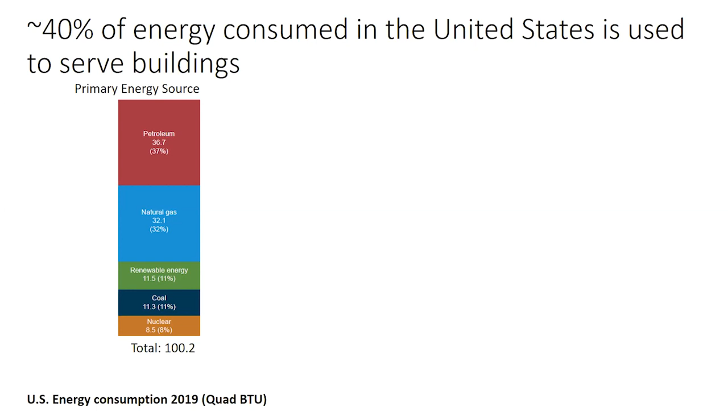So buildings are a really important place to talk about when we're talking about sustainability. They consume about 40% of primary energy resources consumed in the United States each year. And those come from fossil fuels like petroleum and coal, as well as renewable energy. And the US consumes a lot of energy, about 100 quadrillion BTUs per year.

These renewable and non-renewable sources go to produce electrical power, and then they go to end-use sectors, including transportation, industry, residential sector, and commercial sector. And so that energy is either directly going to these end uses, or it's going first to create electricity with losses, and then to power those sectors.

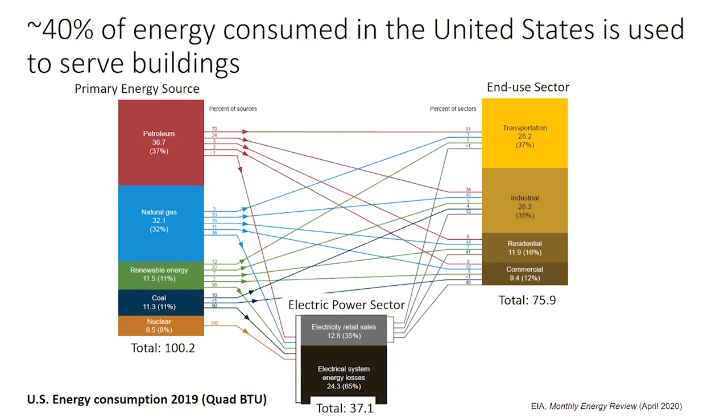Buildings, homes, and businesses in the residential and commercial sector contribute about 12% of the nation's greenhouse gas emissions. And a majority of those emissions are associated with energy consumption. You can see the orange line is the upstream emissions coming from electricity that's used in the homes and buildings. And the blue line are the direct emissions, and most of those are coming from heating and cooking. And you can see over time that there hasn't been a lot of change in the direct emissions.

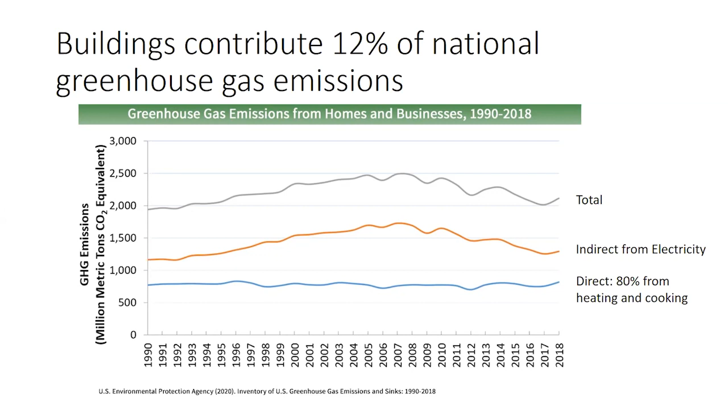This has been a very difficult area to reduce the emissions of, and so it's a really critical place for research to occur. There's a lot of ways that you can quote unquote green a building or lower the carbon emissions associated with that building. In new buildings, this is often seen as designing for sustainability. So they can be more energy efficient, or they can use renewable energy sources. Or in older buildings, you can look at the retrofitting of those buildings, as well as the use of more efficient appliances.

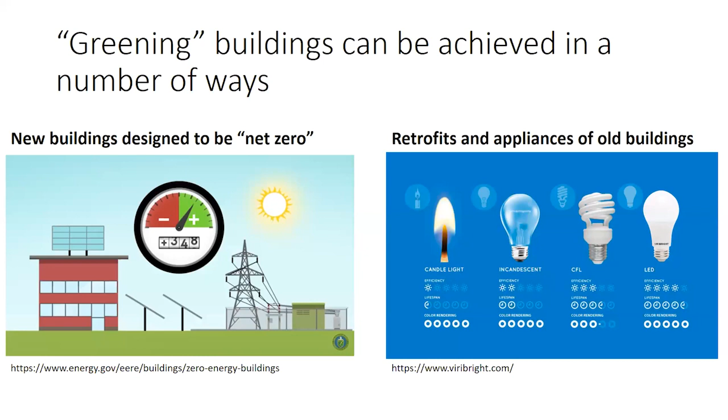So for the sake of the coronavirus era, I am without childcare, so my kid is going to be here. Hey, I'm on a meeting right now, okay? I'll come and get you in a bit. So that's going to happen maybe once or twice.

So these are really important technologies, but at the same time, we're faced with a really pressing, urgent change in climate. And there's also new science coming from smart meter data and climate change projections that are starting to help us understand who's going to be most exposed to these climate impacts.

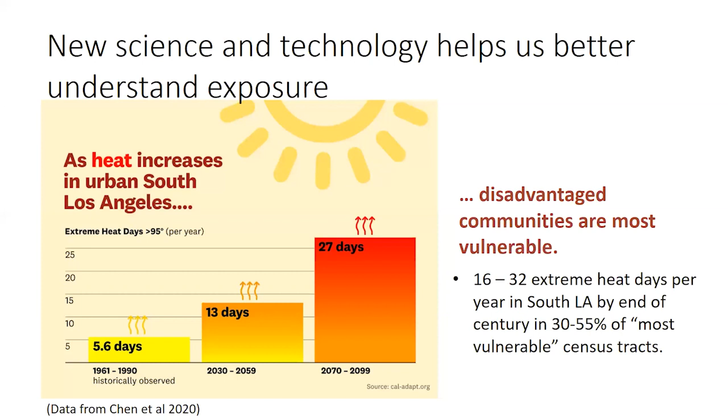So we're faced with a real issue when we talk about equity in sustainability. It's not just about pushing people to use less energy by making them pay more, or having very expensive green technologies that are out in the market and then we somehow hope these are going to be deployed. It's about really lowering exposure of the most vulnerable communities to climate drivers. And this is an area that I'm very passionate about, and I find very fascinating to look at where the opportunity for not only social politics can come to play, but also technology solutions.

So in general, people in poor neighborhoods are going to be more exposed to climate change health threats. And these people are also the ones who probably have less access to healthcare. And we've seen this in the pandemic, the disproportionate amount of people who are affected. So this is what I'm going to talk about a little today for this session, is about how you can have access to not only energy efficiency, but reliable and resilient technologies for providing energy services.

So can we turn this race to net zero carbon into a bigger opportunity to reimagine urban services? So if we're just talking about focusing on lowering emissions and energy efficiency, I'm finding a lot of these projections of what should happen are really looking at an urgency on compliance and adoption of better technologies, or drop-in technologies to what we already have, like hybrid vehicles. And those are very important solutions, but there's a lot more to it to improve a community and create social equity in sustainability.

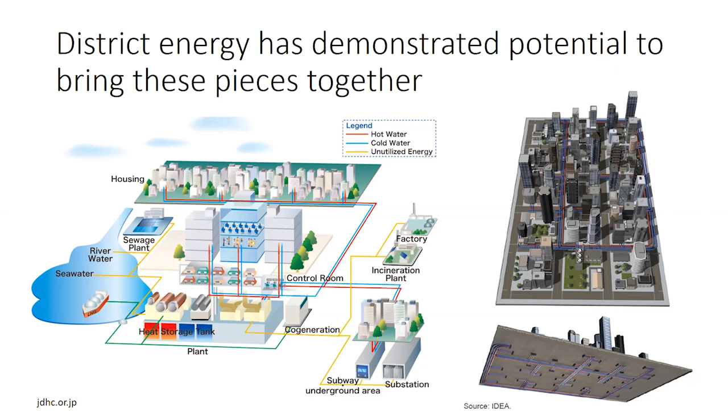There's also an opportunity to bring in waste heat sources and sources of waste biomass that can bring in local industries. And district heating and cooling has changed a lot over time.

Cost savings have been demonstrated in many different end uses. And so there's a really compelling drive now to look at these modern district systems for community service.

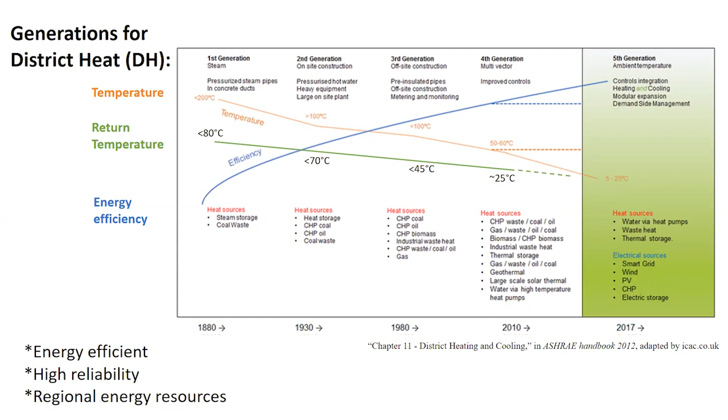There's also fascinating aspects around district energy for their ability to provide this shared sense of energy. This is a very cool project, I think it's in Alberta, Canada, and they use solar energy to actually charge underground where their thermal reservoir is, so that during the winter time, they can actually use that excess energy and provide their heat.

So this is really interesting to talk about sharing thermal energy storage at scale, not each home having its own battery. There's also economies of scale that come from having these large systems. Sure, it's a very large upfront capital investment, but you can apply better, let's say, air quality emission technologies at the facility generating the energy in a way that you couldn't possibly imagine doing at a single building.

There's also district energy solutions for both brand new developments and existing infrastructure. I think it's amazing, this system in downtown Phoenix, how over just a few years, they've been able to add on more and more buildings with one central system. And so the economics of expanding a system to a new building, or maybe a building that just has an increased need for cooling because of changing climate, is possible.

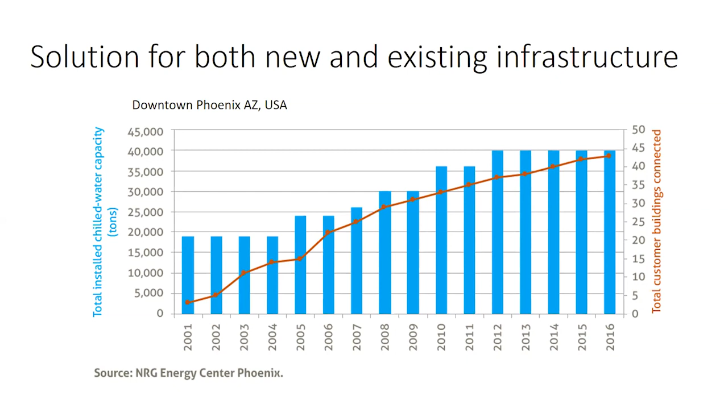So there's also some challenges. District energy largely remains a solution for campuses in the United States, and about 90% are powered by fossil fuels still. So you see here, these are the additional floor space in the United States served by district energy systems.

And campuses are in green, like schools, hospitals, institutions. You have very little change over time in the amount of residential sector coming in.

And this isn't the case all around the world. It's the case in the United States primarily. If you look at these different countries that have a long history of using district energy and cooling, you see they're using recycled heat, direct renewables, and some fossil fuels predominantly in gray. Finland, for example, is driven by district energy because they have so much recycled heat from the paper industry and from their timber industry.

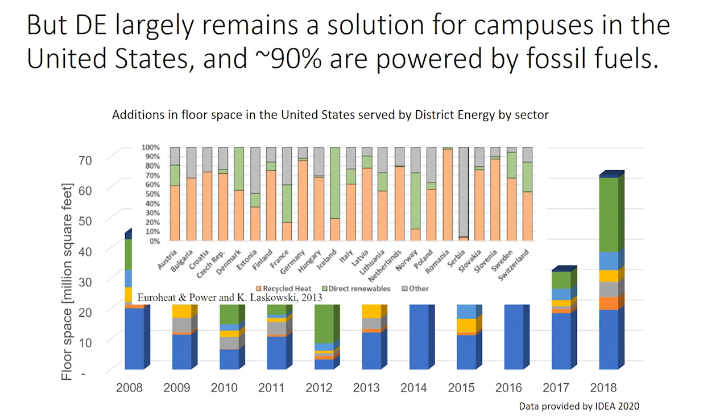And despite there being over 900 systems in the United States, it's not commonplace in the minds of Americans. And that's going to create a challenge when communities are coming together to talk about what are the possible options for a green world. District energy is not going to come into the conversation.

You look at these systems, they're predominantly in colleges, downtown utilities, military, and the trend I see here is that there are single users and operators who are seeing the benefits. Even if many students on a campus are benefiting, they don't understand where their energy is coming from. It's going to be the campus who gets the benefits.

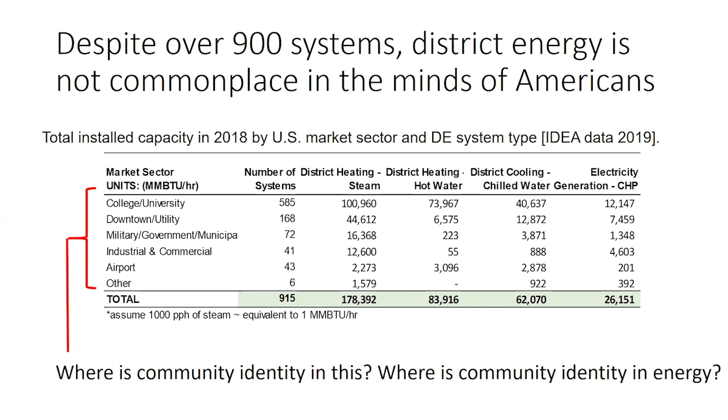And so in my mind, I see this as a real challenge, that there's no community identity in this. It's not multi-stakeholder. In general, we have this issue in the United States that there's not a lot of community identity in your utilities. And I think that's changing, and that's an opportunity that can be leveraged in a big way when we start talking about sustainable communities.

And there's a lot of opportunities for district energy to play a role here, because a lot of the end uses for energy in buildings are not easily electrified, which means you can't just switch it from natural gas or fossil fuels to electricity so rapidly. You have a lot of homes, you might have the home yourself that's heated with a wall heater that runs on natural gas. And there's a lot of systems in industry that really fit well with the high temperatures required for their processes with steam.

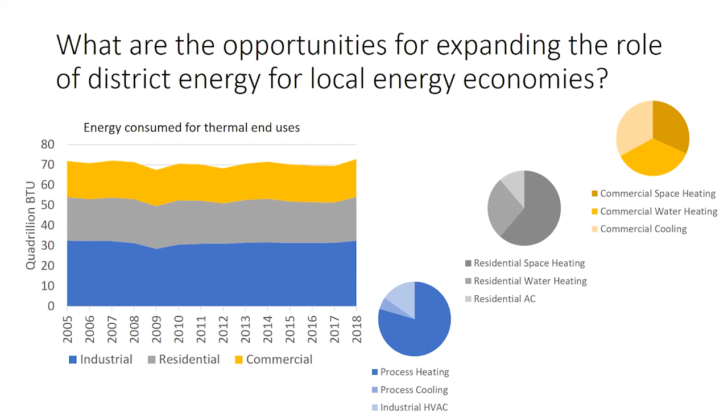And so when we look at what's been happening in the last few years, a recent report, a 2019 Congressional Report, attributes growth in the district energy sector to two primary factors. One is expansion in traditional markets - that might be campuses, military bases, airports. And the other is sustainable city initiatives, renewable energy standards, and the need for resilience in new markets.

And when I was looking through the literature and at different reports with the support of IDEA, the International District Energy Association, we found that this second point is very hard to validate. There's a lot of qualitative information, but not really a lot of quantitative information. And from a research perspective, this is an area for improvement, where you need metrics and validation to be able to go to communities and demonstrate that these systems don't just work on campuses - they also can work very well for communities.

So when we went through different proposals for projects that might be coming online in the next 10 years, looking at these drivers, you can break them into a few groups for simplicity. You can talk about the energy supply conditions - do you have a lot of thermal resources on hand in the area? You can talk about energy demand conditions - do you have the right density of buildings that could benefit from this district energy? Do you have policy conditions that would incentivize the use of regional energy resources or community sharing? And then do you have that drive, that local energy economy with real stakeholders who are invested in making this happen?

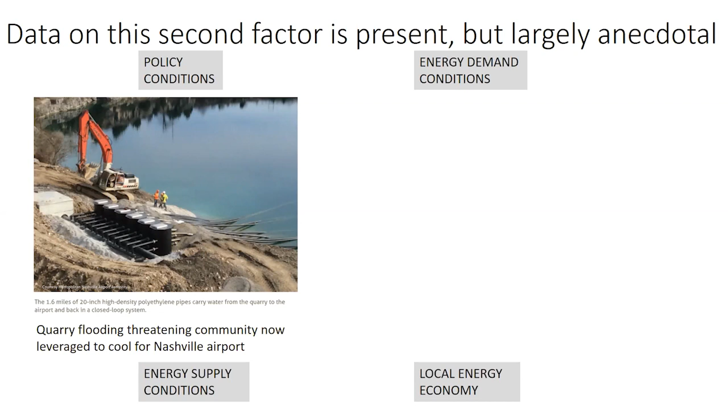On the other hand, you have growing cooling needs in downtown Phoenix, which has led to a very, very successful district energy system and its expansion.

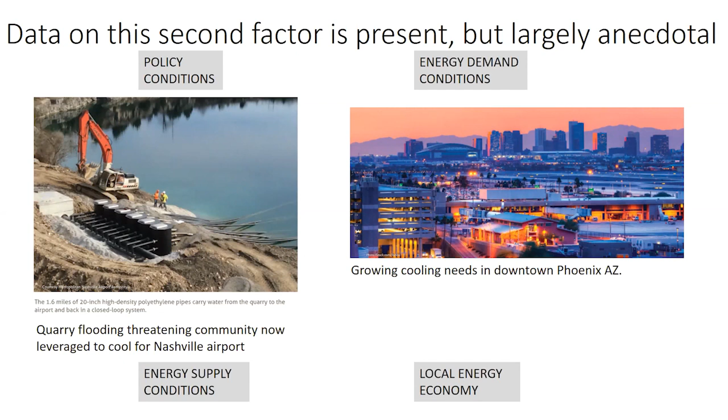There's substantial amounts of cooling and new developments in the area. So the complexity of this is real, and there's a lot of pieces, some qualitative, some quantitative. But if you break these down further into what are the drivers for different scenarios of deployment, you can start to see some trends.

What we found is that you can break expansion of district energy into new projects, brand new developments of district energy, expansion projects where you have an existing system and you're expanding it, and modernization projects, which I view as retrofitting of the system. Maybe it only provided thermal energy and now it's going to provide electricity, or maybe you want to make it more sustainable, and instead of using coal, you might use biomass.

So you start to see some factors are across the board going to be beneficial: zero carbon goals, new energy resources, increased cooling loads. And then you see some that are very specific to one scenario. For example, a brand new system in a local energy economy really requires an understanding of who you're displacing, what the utility support might be for this system, and how this is communicated to the users.

In my research, I work with a number of people at the lab, and we coupled this project looking at district energy system drivers with another project done for the California Energy Commission that looked at the ability for mixed-use developments, meaning a mix of residential, commercial, hospital, other types of floor space. We looked at the growth of floor space and need for these buildings in California, areas where there was a high likelihood of these mixed-use developments being generated by 2050. Then we tried to understand whether there was an overlap of drivers where there would be potential for district energy to serve those systems.

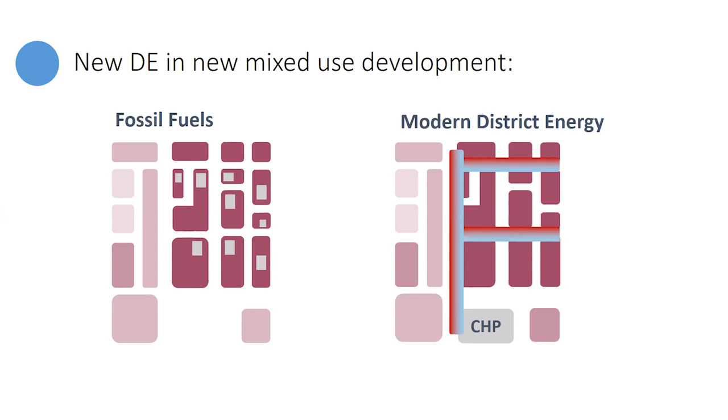So what we did is we looked at a modern district energy system that uses what we call CHP, combined heat and power, providing electricity and heating and cooling to these buildings, and we compared it with the fossil fuel option, where you have a grid coming in providing electricity, and individual buildings with their boilers in the basement. We also compared this with a renewable scenario, to understand the benefit of using this district energy system instead of heat pumps based on renewable electricity.

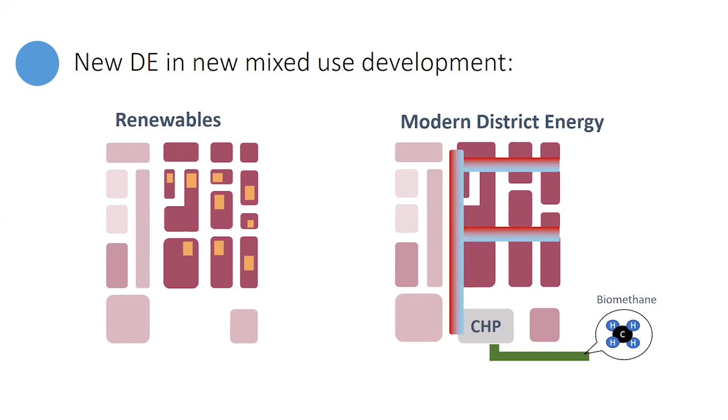We also looked at the opportunity for using the growing amount of bioenergy in California. For a brand new system, we considered an ability to tap into a resource that looks a whole lot like natural gas, a drop-in technology using natural gas pipelines, and through policy you can get credits for using bioenergy injected into that pipeline. Or if it's a brand new development, you could talk about a community co-locating that district energy system with a new mixed-use development and some system to take the waste, your garbage, food waste, or local agriculture waste if you're in the Central Valley, and convert it into energy on site.

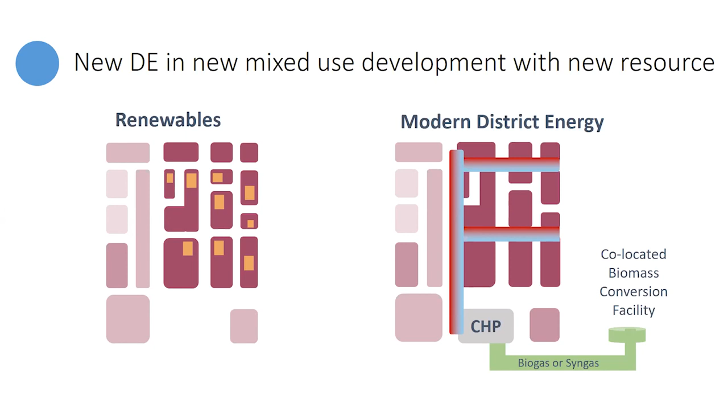Now, there's a lot of problems with trying to propose this in a community that's already established. Some of these facilities might be noisy, they might be smelly, but if you have a brand new facility, you might be able to design it in a way that makes more sense and doesn't have these local impacts on the community. There's also then the classic case of the expansion of existing district energy systems, so we looked at that.

We looked at a community with a district energy system, we have a number of them in California. And then we said, what does the economics look like for just expanding it to a new community, like a multifamily house. There are other examples for modernizing, and we're starting to see proposals coming in.

This is downtown Pittsburgh, actually, where this conference was originally going to be held. They have a number of systems, and there's some real interest in creating more of an energy sharing situation. I think this is really fascinating - we talk about the shared service economy where you have Lyft and you don't own your own car. Maybe we can get people to start thinking about this for energy too, where you're sharing resources, and instead of these four blocks being totally separate networks, they actually tap into each other and create a more resilient system.

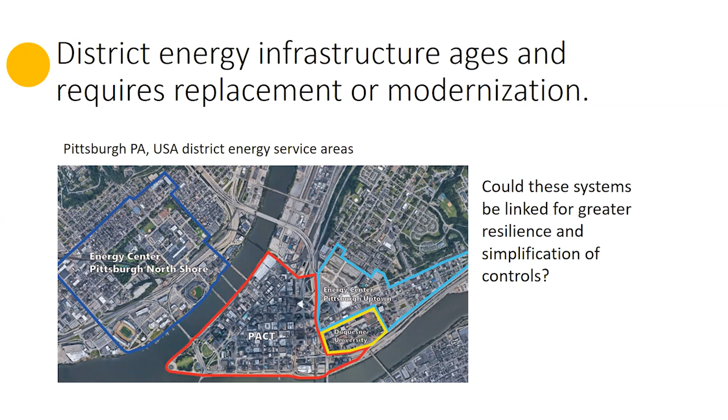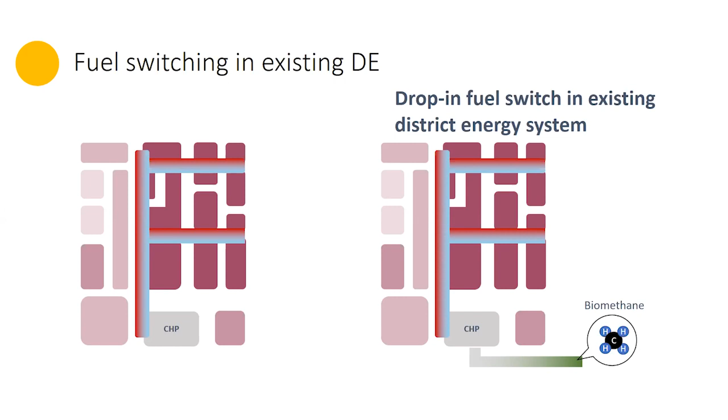In the same vein, there's also the ability to modernize a system through fuel switching. And so we looked at that. We said, okay, you've got this traditional system that's using fossil fuels like natural gas, and now you're going to switch it over to a renewable resource. There's also modernization where you didn't provide electricity originally, and now you're going to switch it over to combined heat and power.

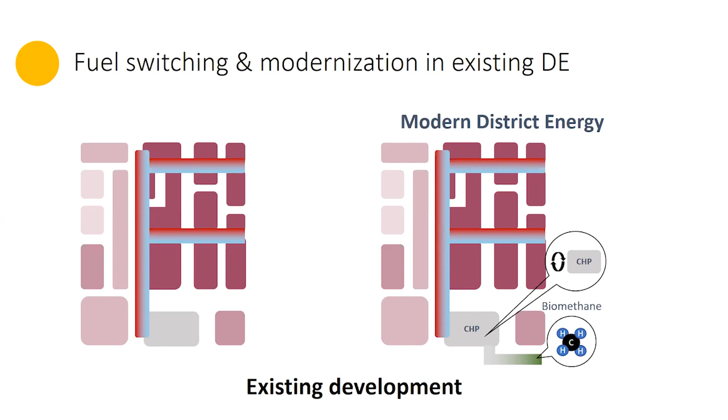So we looked at the cost of this, and I'm going to show some results for the Bay Area. So you see this is amortized annual cost in millions, and the point shows the net, and these lines show the profile of the cost. So this is heat pump electricity in this renewable energy scenario. So here we have renewable energy powering heat pumps.

We show labor, we show the sales, which would be the revenue, and then we compare that with the fossil fuel case. And you can see from the net that the renewable heat pumps is going to cost more than the fossil fuel system.

Then when we compared this to our district energy systems, and these are all brand new systems, we found that this is biogas, where you aren't cleaning it up and you have a local facility generating it. Biomethane, where you just tap into the natural gas pipeline and you're paying for the renewable energy credits. Or syngas, which is a mix of kind of hydrogen and carbon monoxide that's generated from the gasification of very dry biomass. So these are just technologies for making bioenergy.

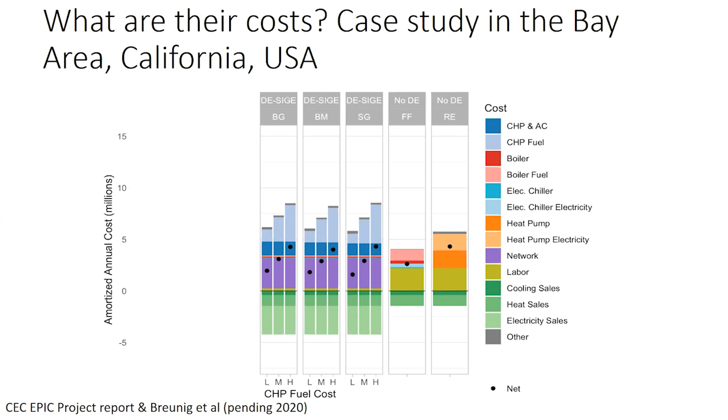And we look at the cost profile, and we find that based on the price that we assume for this fuel, you can actually get substantially better numbers than the fossil fuel system. You can also get a little bit higher than the renewable case at the highest fuel price. So this is a really interesting analysis because it's starting to demonstrate not just we know policy is important, but how important is it? What's the difference between being better than renewables or fossil fuels?

And then finally, we looked at, instead of using a spark ignition gas engine for these systems, a fuel cell, so a bit more modern for the combined heat and power facility. And so that also gave us some new results on not only the policy aspect, but the impact of technology.

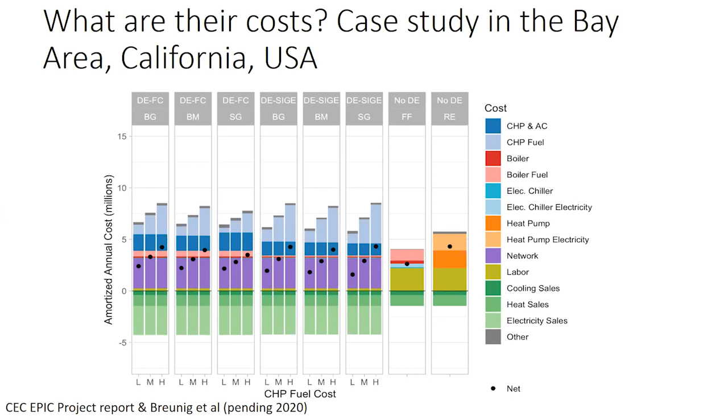We looked at 5 different areas: the Bay Area, the Central Valley, Los Angeles, Northern Central Valley, and San Diego, where we expected these mixed-use developments to be very viable. And we looked at the case for what we call expansion. So not just a brand new facility, but an existing facility that's going to be modernized or expanded. And so here you can see there's also cases where you can be negative and cases where you can be positive. And it is dramatically different based on the need for energy in these different regions.

Each of these different systems provides the same amount of electricity and heat in one location, but then across the different locations, we found very different sizes of district energy systems were going to be needed. So the Bay Area is a mild climate. It had actually the smallest system, and then some of the largest systems were in Central Valley. So this was a very interesting analysis to be able to combine not only just one location, but to start generalizing what our findings are.

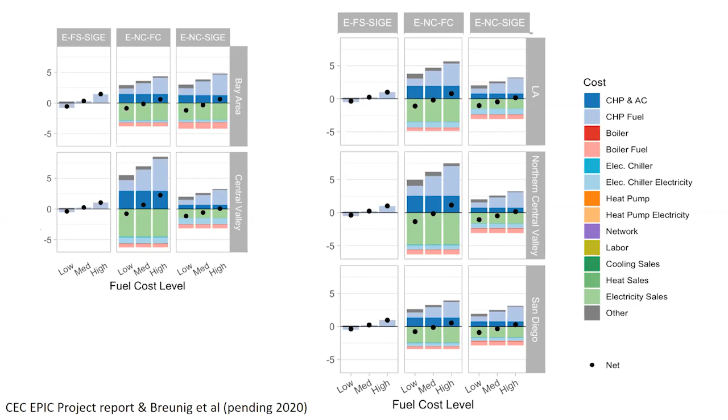And so what about new district energy systems in existing communities? So far we've talked about largely brand new systems. Well, this is a very challenging piece to bring in because a district energy system requires digging up the ground, putting in the pipes, and that's disruptive to traffic. And it also might be having to maneuver around the location of buildings that aren't designed for district energy.

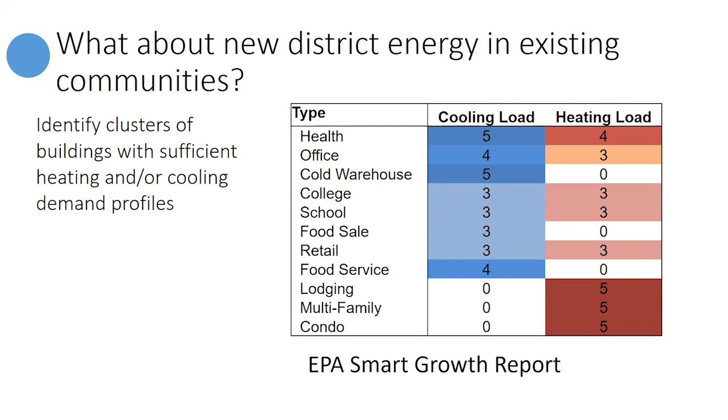It has a high cooling load, has a high heating load. And based on these rankings, we were actually able to look at the buildings throughout California over time. We developed a building stock turnover model, which means you project construction and demolition of different buildings that you have, and based on economic drivers and population, what the potential buildings might look like in the future.

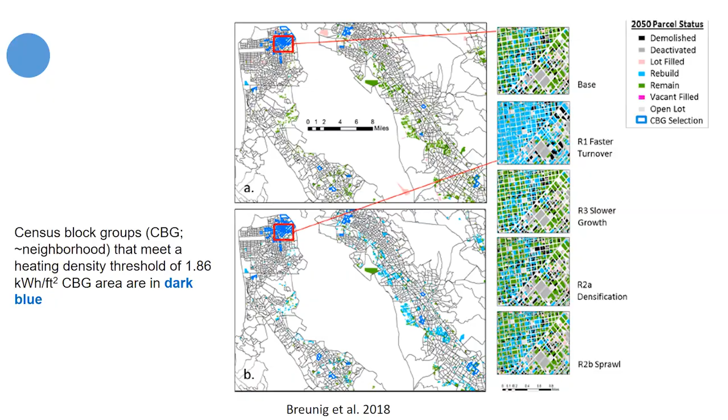And so what's in the pipeline? What are the big messages here? We find that there's a lot of key benefits for district energy systems that have already been demonstrated in traditional markets. And this is also true for just combined heat and power systems in general and microgrids.

And that comes from energy surety, knowing what you're going to get with your investment; economic value, knowing that this is going to create cost savings over a long period of time; sustainability, knowing that you can create a low carbon future; and resilience, knowing that you are able to provide power in the face of outages or unexpected disruptions.

So all of these we find appear to be drivers also for communities, but there are clear barriers that are affecting this deployment. One of those, as I've mentioned before, is just helping increase the profile in the minds of people of district energy and the services it can provide. One key way to do that is to do these cost assessments and help people understand exactly what these drivers look like. Another is really creating new incentives for overcoming this upfront infrastructure.

This is large infrastructure, and if you're building it in a location where there are no buildings, you have no buy-in yet. You don't know who your customers are going to be, and that is a very high risk to ask someone to take on. So there's some challenges. And also district energy is not going to work everywhere.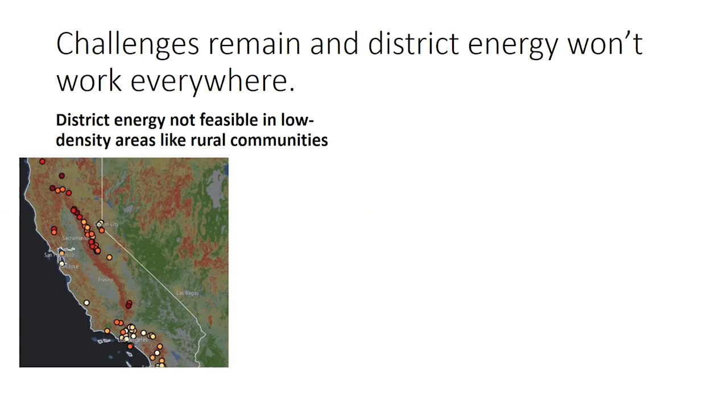There's also, as I mentioned, a lack of innovative project financing already out there, even if there have been many, many demonstrations of these funding concepts over time in the conventional markets. So I think there's a translation that needs to happen into the community space. And then finally, there really needs to be this coupling of viable technologies and end uses, demonstrating it and having these early market adopters really push the value.

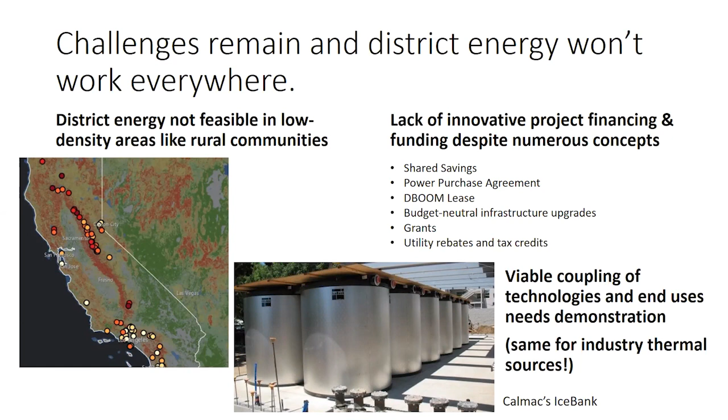And this is a very cool system, in my mind. It's Calmac's IceBank, and it shows how you can create ice when the sun is shining and then use that ice later, all sorts of thermal energy storage to help you buffer those uncertain times and create a more resilient system.

And so just to end, I'll say that in these findings, I've largely found that the key will be inclusion of communities and industry stakeholders in research projects driven by established actors who are very familiar with these highly complex systems in district energy and demonstrate the scale and return on investment. And so this is a long process to get community buy-in, but I believe over time, the value of this is going to create more long-term benefits in terms of CO2 reductions and resilience.

And so we talk about the urgency of getting to carbon neutral by 2045. That means we have to start this process now if it takes 15 years for community buy-in and deployment and operation to successfully happen. And with that, I will open it up to questions.